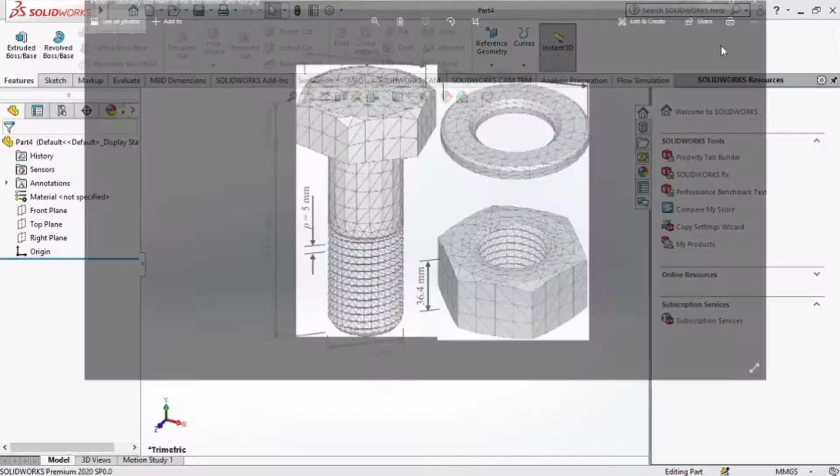So the first thing we do is specify the material we'll be using. Alright, and I think the one we're going to be using is 201 annealed stainless steel. So we apply, then we close. Alright, so we go on the front plane, on sketch, we go for the hexagon there, and then just at the center of the axis we draw our hexagon, and then we give the circle a diameter of 80 millimeters.

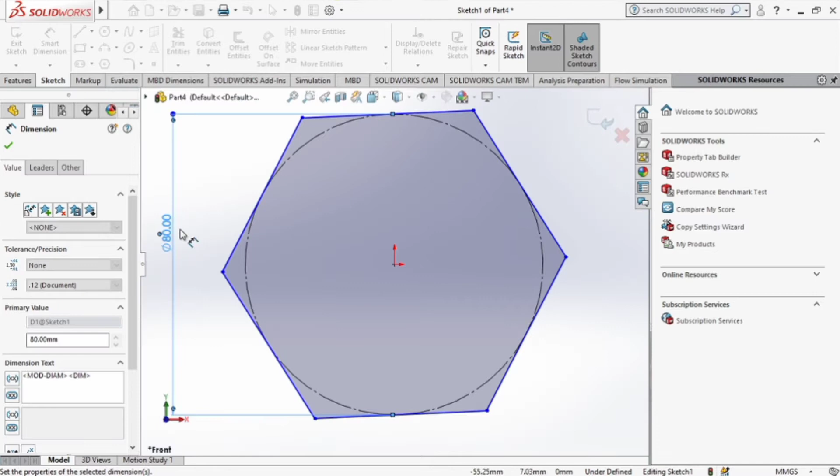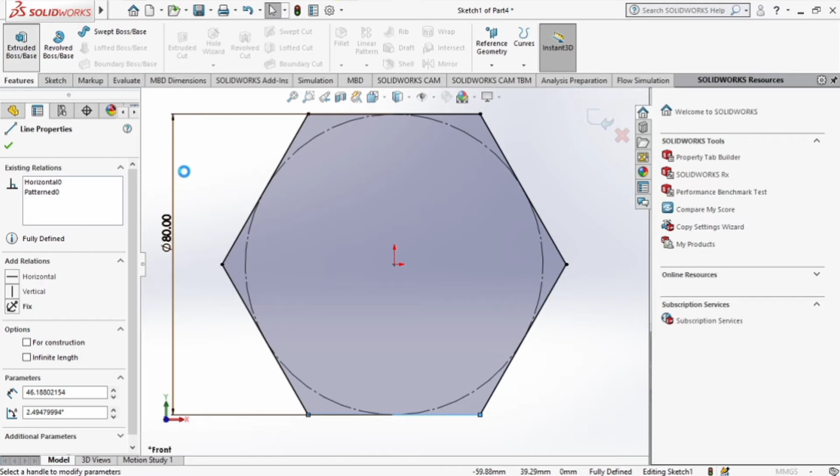Okay, you can just make sure that the bottom part of the hexagon is horizontal. Just click OK on the dimensions, then click on that line, right click on it, and then you can just go for the horizontal like that. You can go and extrude it. Okay, extrusion, we can select the plane to be in the middle, and then we can give it a width of 30 millimeters. Click OK. Alright, now on any face, the two faces that we have, we can just click on it and select the normal to option.

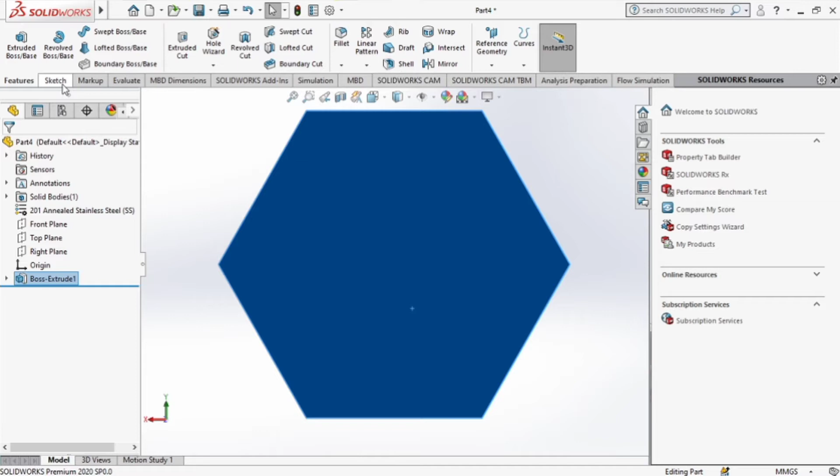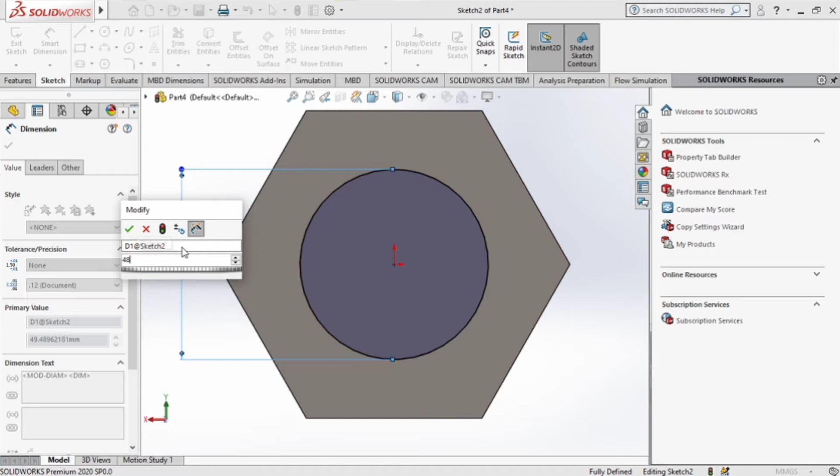Okay, then we can sketch a circle just in between, right, not there, right in between, there we go. Okay, you can give the circle a diameter of 48. Okay, and then we can extrude it, and we can give it the length of 130 millimeters. There we go. Okay, it was 130. You can't see it clearly, but it should be 130.

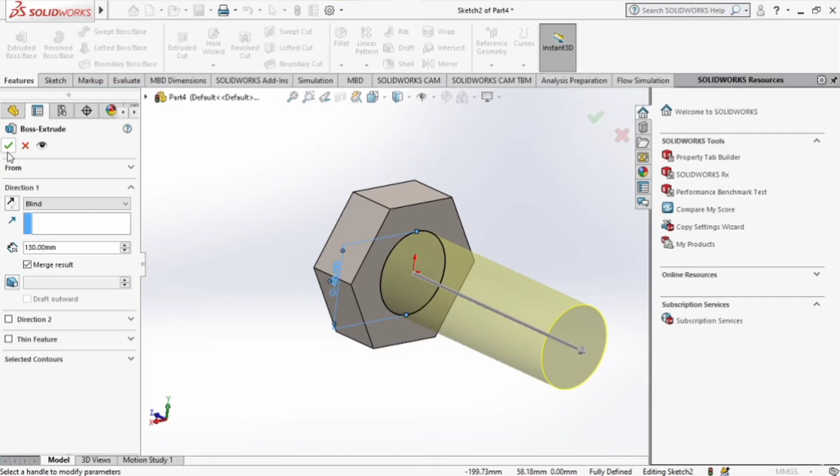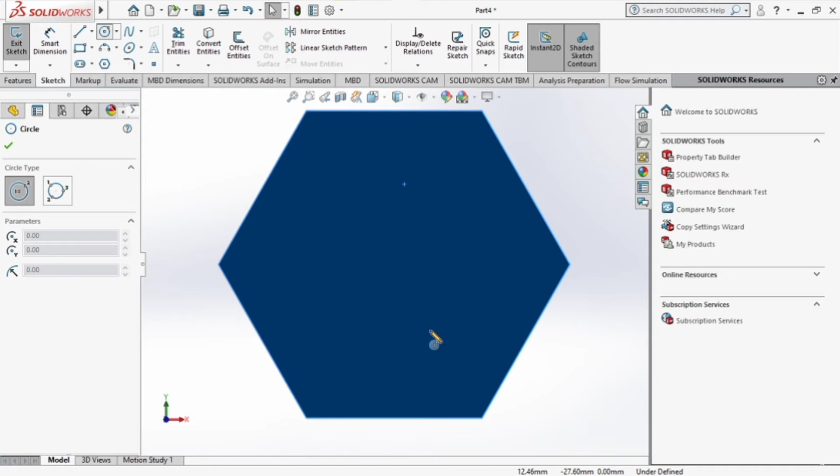Okay, one thing we'd like to do is, obviously, make the bolt slightly safer by just chamfering the sides. I don't know if you can see, but the top part of the bolt is a bit chamfered, so we can try to do that. Okay, so we can select the outer face of the bolt, go on sketch, and then we can sketch a circle. The circle's diameter should be the same, should be 80 millimeters, the same as the radius of the bolt. Okay, you can give it a diameter of 80. Okay, now since we are chamfering it, we can just go on the extruded cut.

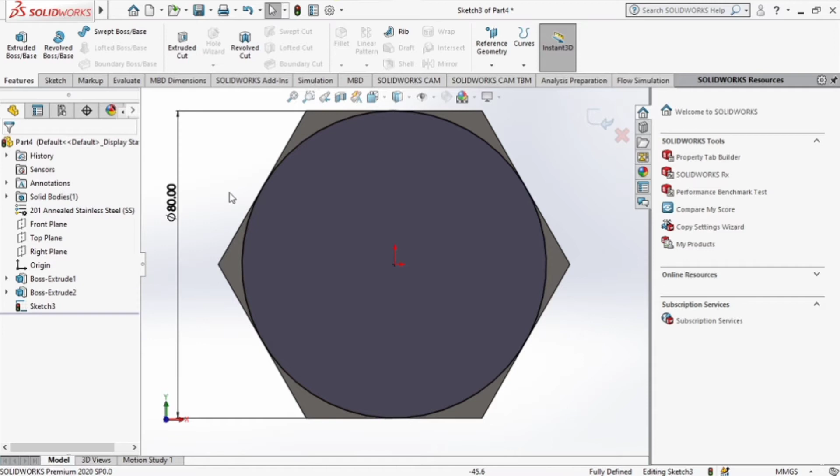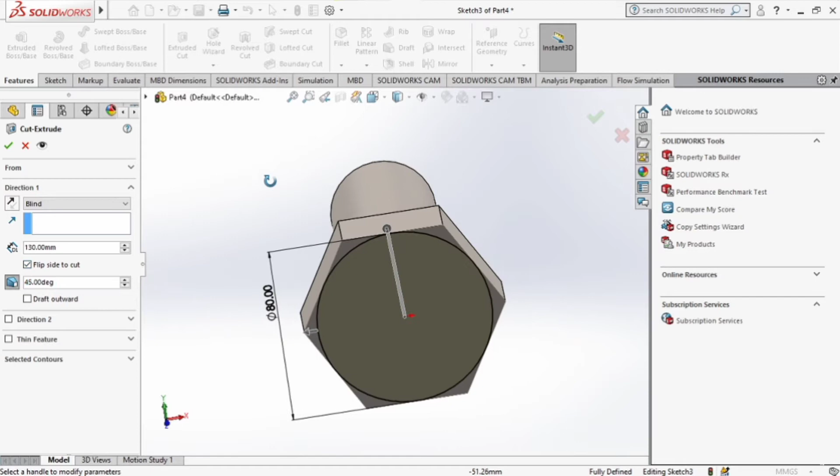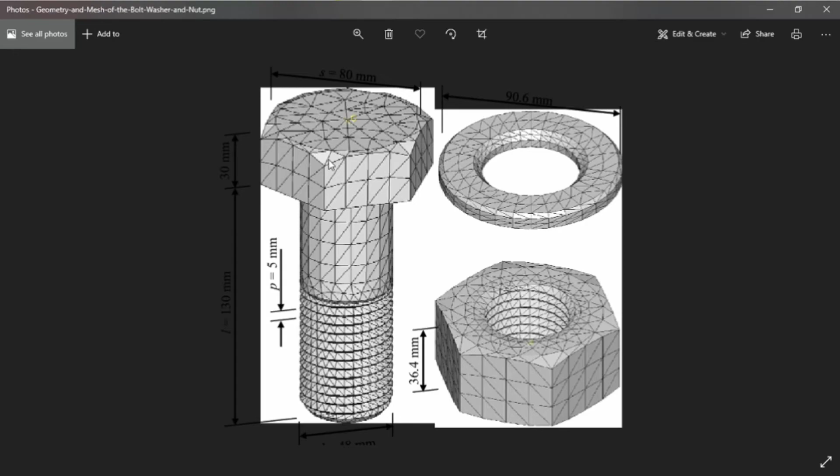Alright, so go on the extruded cut, you can just reverse the direction. Okay, you can select flip side to cut, and we can give it an inside angle of 45. We can just increase the distance a bit, just slightly. There we go, and then we can click OK. Right, so it's chamfered inside a bit. That's good. Now next we'd like to make our external threads. That's the next thing we have to do.

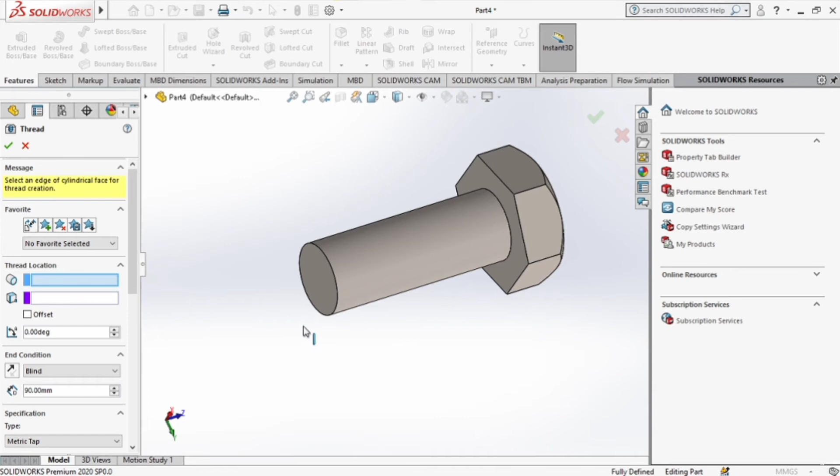So now there are two ways of making threads: there's the helical and spiral way, and then there's using the hole wizard. So in this series we're just going to focus on the hole wizard, which is just basically the threads. So we go on the hole wizard and select threads. Alright, that might pop up if you're opening it for the first time, just telling us how we can use it. And then we can select the edge from where we want our threads to start. So we can just select that edge over there, like that, and I think the thread should pop up a bit. There we go.

And then we can select how far we want the threads to go. Is it going to be blind, or would we like them to go up to the very end, like that? But based on the nut we're designing, they go up to a blind part, and in this case we can just select blind, and then we'll be able to specify how long we want the threads to be. In this case we can just give them a distance of 90 millimeters on the inside. Okay, now I need to reverse.

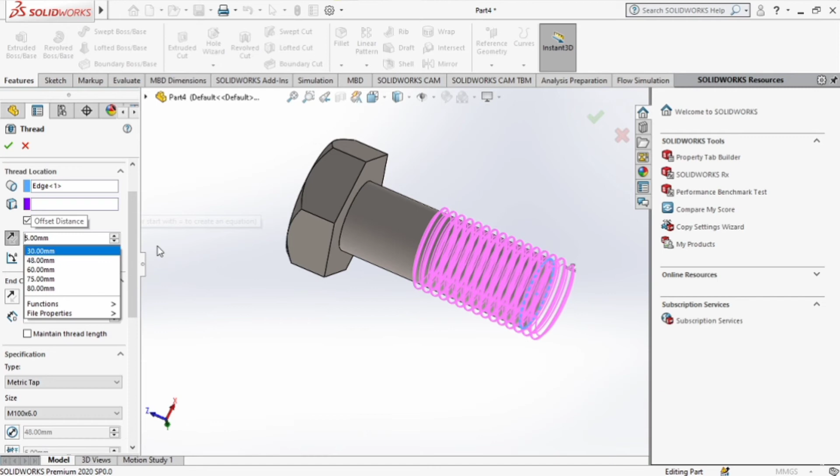So what we'd like to do is click on offset, and what offset does is that it kind of moves the threads on the outside, and we can just move them on the outside a bit, just by 5 millimeters should do. We'll be able to see specifically why we're doing that later on in the video. Okay, that's done. So one thing we also like to do is make sure that they're extruded threads. We don't want them to be internal threads.

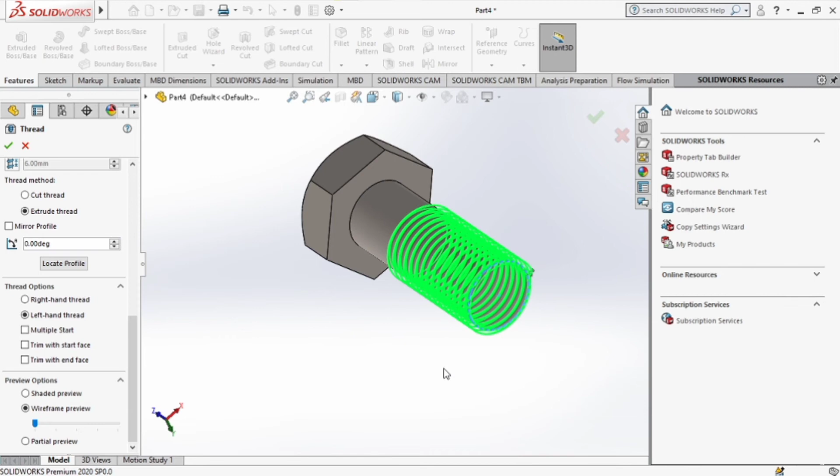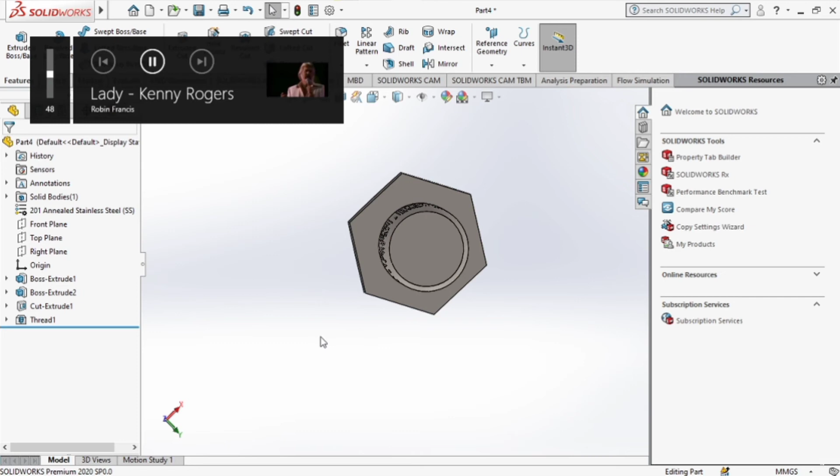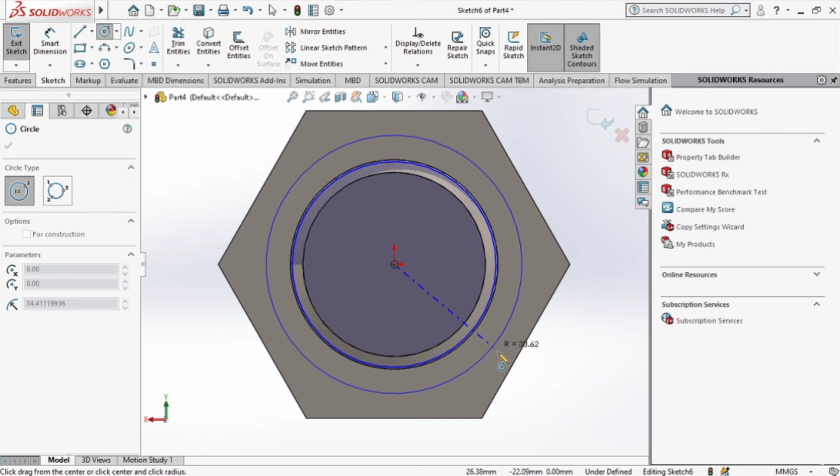So what we do, select that part, and then we're going to construct two circles. One circle is going to have a diameter of 48, which is the diameter of the pipe, and then the other one is going to have a diameter of 80, which is the diameter of the hexagon. Okay, so we dimension it. We give it a diameter of 48, and then a diameter of 80, which is already the default diameter we've been given in this instance. We just select OK. Okay, so what we do now is go for the features and go for the extruded cut.

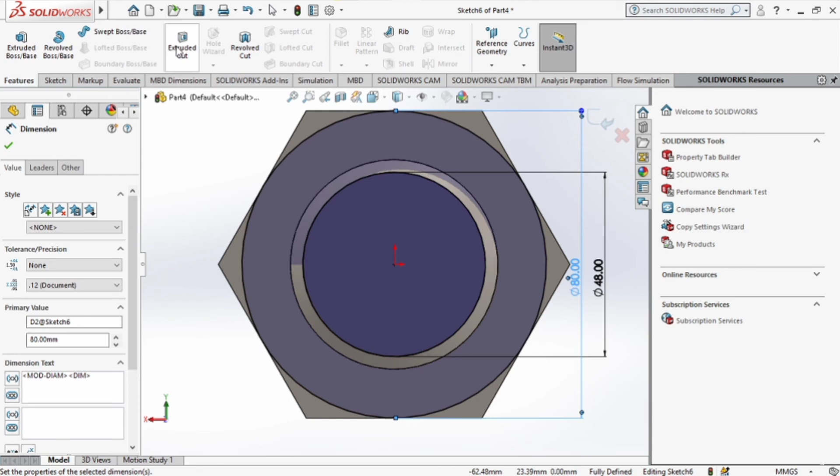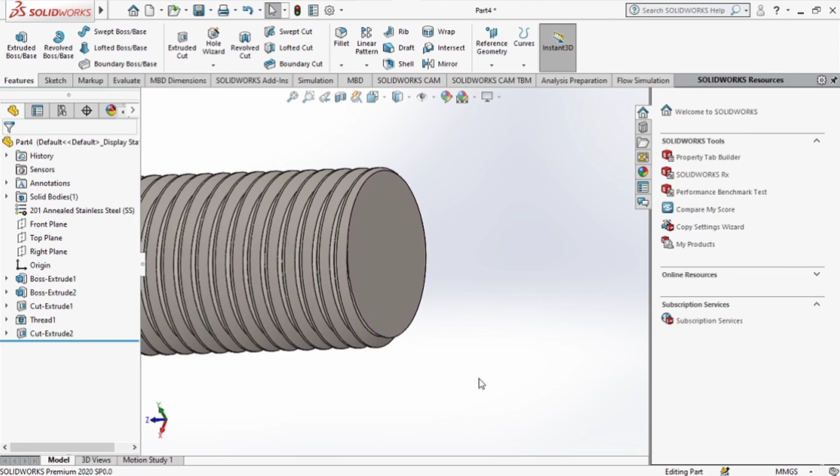Okay, so what we do in this case is we reverse the direction, and as you can see, it's just cutting that specific part, and there we go. We've got threads that are starting out right there. Okay, that was easy. Right, so I think that's it with the bolt. In the next video, we're going to try and make a nut. That's the nut we're going to try and make in our next video. The next thing we can do is just save it.

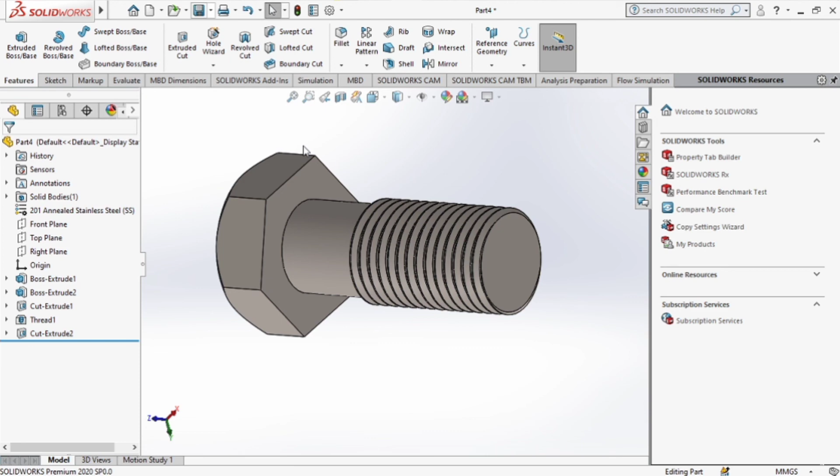All right. Thank you very much for watching part 1 of this video. Please look out for part 2 and part 3, where we'll design the nut and possibly assemble it and try to simulate a nut rotating over the bolt.